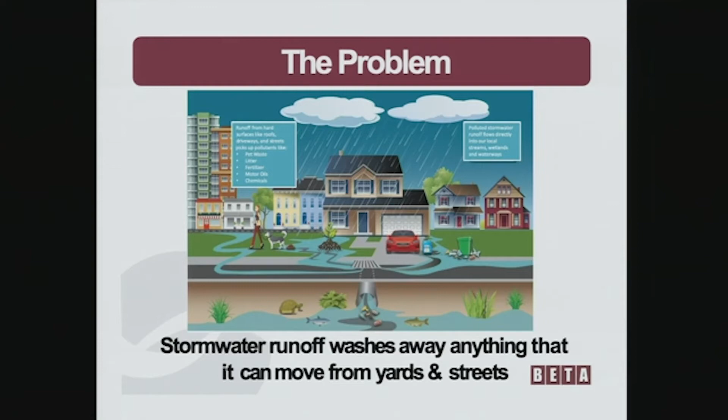Can we ask questions at any time? If you don't mind, I think I'll get through the presentation because some of your questions might be answered as I go. And then I will take as many questions as we have at the end.

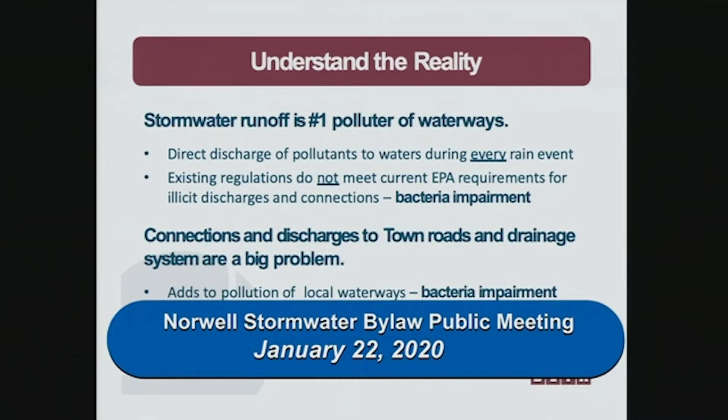So the reality of the issue here is that stormwater runoff is the #1 polluter of our waterways. The direct discharge of pollutants to the waterways happens during every single rain event. The existing regulations here in Norwell do not meet the current EPA requirements for illicit discharges and connections. And in Norwell, the waterways here are impaired for bacteria, which is directly related to illicit discharges and connections. Also, connections and discharges to the town's roads and drainage system are a big problem as identified by the Highway Department.

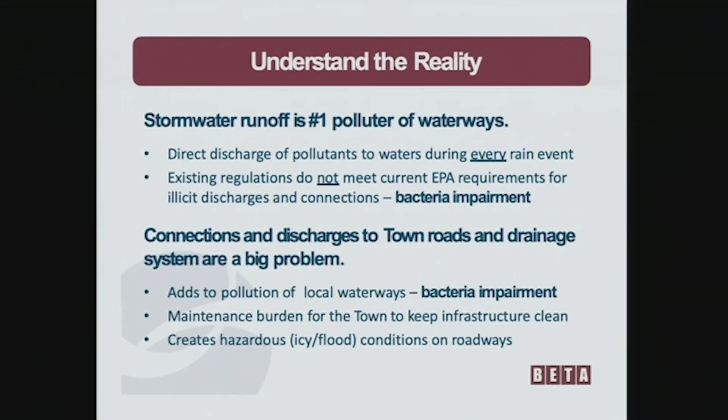All the pollutants that make it into the drainage system through the catch basins, once they are in the drainage system, it becomes the town's problem. The bacteria impairment is something that the town is responsible for, anything that gets through the system to the waterway. Also, these connections are a maintenance burden for the town because they're required to keep the town's drainage system clean, keep these pollutants out. In addition, water that's discharged onto our public roadways becomes a hazard. It can create icing conditions in the winter, and it also creates flooding conditions on the roadways. As we have more impervious areas and more intense rainfalls now, there's more water in the system. The drainage system was not designed for all the flows that are contributing to it now.

So the town of Norwell specifically has impairments in its waterways for bacteria. The North River, Second Herring Brook, Third Herring Brook, Longwater Brook, and the entire South Coastal watershed is impaired for bacteria. Also of note in Norwell, First Herring Brook, Accord Pond, and some other tributaries do discharge to drinking water supplies.

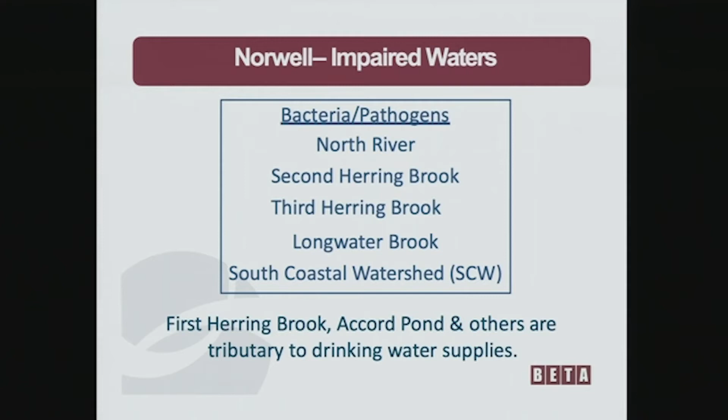So why do we need this bylaw? We need it because the existing water quality is impaired and existing discharges to town roadways are a hazard. So we need to do more than simply keeping it from getting worse. We need to be proactive. Also, pollution prevention is easier and more economical than treatment. It's a lot easier to keep pollutants from getting into the water at their source than it is to clean them from the water once they're in there. Also, compliance with the EPA Clean Water Act is not optional. So once it gets into the water and into the town's drainage system, the town needs to deal with those pollutants per the Clean Water Act.

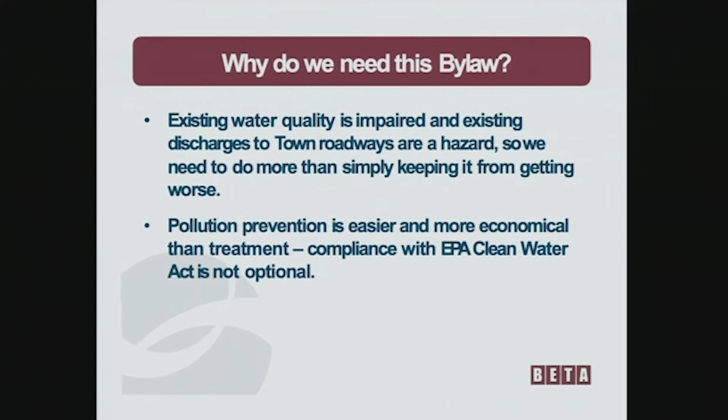So what will this bylaw do? It will control runoff from existing development and new construction of single-family properties through basic control measures. It will recharge groundwater to prevent runoff, reduce runoff, and to recharge groundwater aquifers for our water supply. It will also distribute the effort among those contributing to the stormwater system. If we don't distribute that effort, then it all falls on town resources.

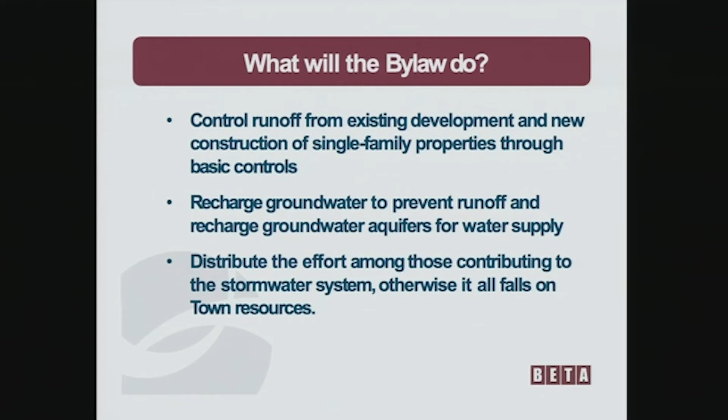So the Norwell Stormwater Management Bylaw is made up of 3 articles. The first article is general provisions. Article 2 is to prohibit illicit discharges to the MS4, which is the town's drainage system and waterways. Illicit discharge means that no person shall dump, discharge, spill, cause, or allow any pollutant or non-stormwater discharge to get into the town's drainage system or a water course or a waterway of Norwell.

It also says that no person shall connect a pipe to the municipal storm drain system or in any other way perform a modification to the town's drainage system without an approved drainage connection permit from the highway department. It also says that no person shall allow a pipe, swale, or other point source to discharge onto a public way. This is in reference to the town code.

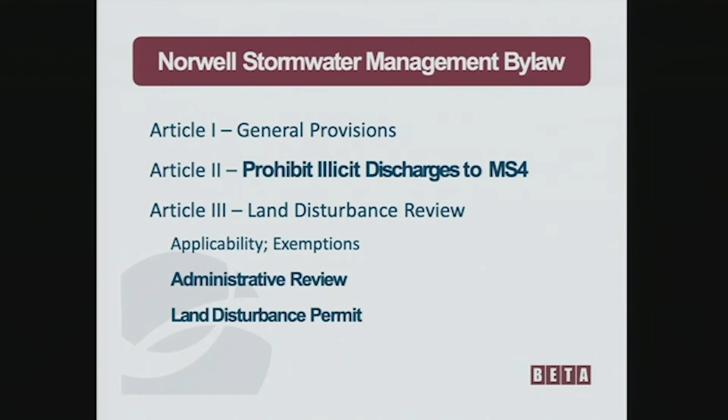Article 3 covers land disturbance review, and there's 2 levels of review. The first is administrative review. So the administrative review threshold has 2 parts. Any land disturbance activity between 500 and 25,000 square feet that's tributary to a street or a drainage system requires administrative review, or any increase or change to impervious surface between 500 and 5,000 square feet.

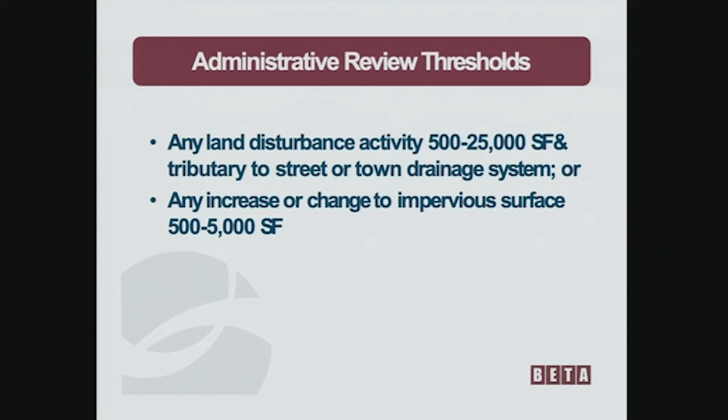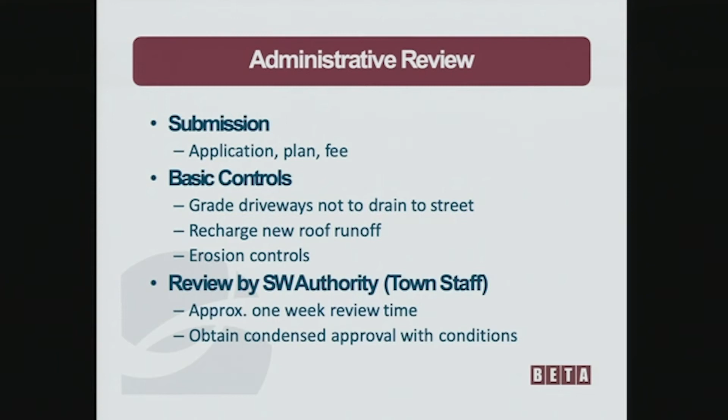So administrative review consists of a submission of an application, a 1-page application, a sketch plan, and a small fee. And what's expected is that basic controls are implemented for the project. Those include that the driveway is graded not to drain to the street, that any new roof area recharges into the ground, and that simple erosion control measures are taken. Review is done by town staff. It's expected to take approximately 1 week for the review, and you would obtain a condensed approval with some conditions.

The second level of review is the land disturbance permit. So the threshold for a land disturbance permit is greater than or equal to 25,000 square feet of cumulative disturbance on a site, increase or change in more than 5,000 square feet of impervious area on a lot, any land use of higher potential pollutant loads, we call these LUHPPLs. These are things like gas stations or salvage yards that are prone to have more pollutants that are exposed to stormwater on them, or any new or redevelopment of retail, commercial, or industrial use.

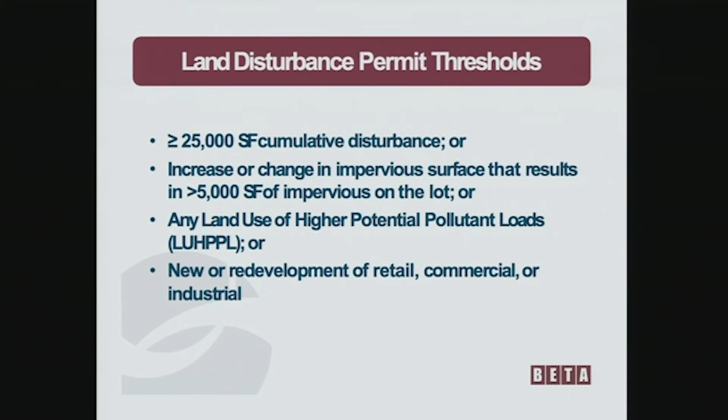So the land disturbance permit consists of submission of an application, a stormwater plan, an erosion control plan, an operation and maintenance plan, and supporting calculations. It's expected that controls are implemented to manage stormwater runoff on the site and to meet the state stormwater management standards. These are all things that are required now by the planning board and other review boards in town. So this is not a change from what is currently done for larger projects. This would be a public hearing process, and it would be done through conservation, and you would obtain approval with conditions if it's designed appropriately.

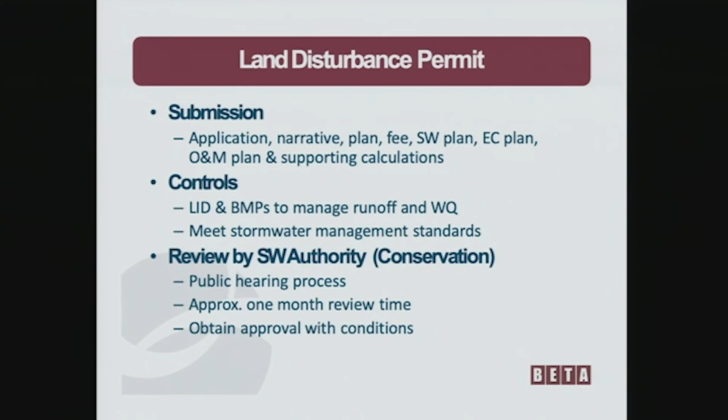So now I'm just going to go through some examples of how this bylaw might impact people in different situations. So the first example here is for an average single family home. What the working group did was look at some recent submittals on some large single-family home development projects, and they took the land disturbance numbers from those projects to see what the sizes were of the houses and disturbance as far as driveway, front yards, land clearing. And the average house was about 15,500 square feet in total disturbance area. So according to this, a single family home would fall under 25,000 square feet of disturbance, and it would be less than 5,000 square feet of impervious area that's being made up of the house and the driveway. So in this case, you would be required to do an administrative review.

The second example here, I have 3 scenarios. One would be clear cutting on a lot of trees where the surface slope and direction of the flow from the property is toward the town roadway. A new single family home house addition or a new garage, or reconstruction of a driveway. These 3 things, if they were between 500 square feet and 5,000 square feet for the addition and the driveway, or between 500 and 25,000 square feet for the land clearing, would require just an administrative review.

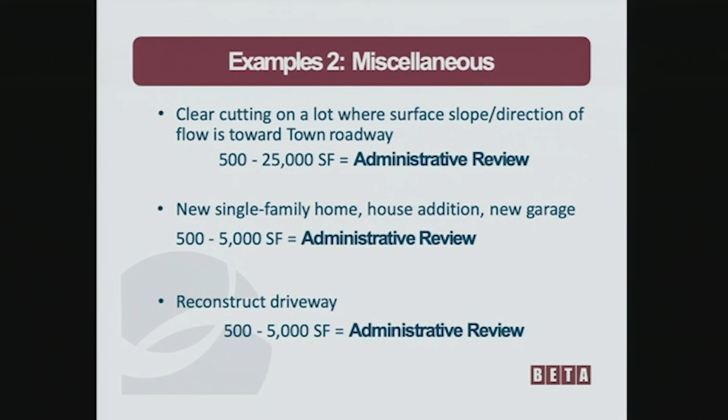Some examples of things that would be excluded from this bylaw would be adding a second story over an existing garage because you're not changing the amount of impervious area on the site. So this would be excluded. You would not have to file for any review. A new patio or a walkway of any material that's less than 500 square feet of disturbance would not require any type of review. A new 1-car garage or shed, approximately 384 square feet would be a typical size, would be less than the 500 square feet of disturbance. It would not require review under the stormwater bylaw.

The stormwater bylaw includes some exemptions as well. So maintenance of existing structures and impervious area, landscaping or lawn associated with a single-family home does not require any review. Conversion of lawns to vegetated landscape or construction of utilities other than drainage that do not alter the drainage patterns would not require review under the bylaw.

Normal maintenance and improvement of land and agricultural uses would be an exemption, as well as if you have disturbance or development that requires permits or approvals from other boards, such as conservation, order of conditions, site plan review, planning board. As long as you were demonstrating compliance with the town stormwater management regulations through those processes, you would not have to do an additional permitting process through the stormwater bylaw.